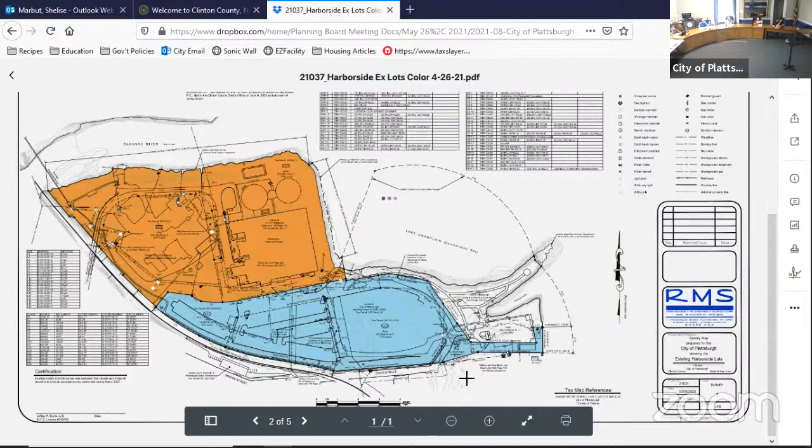That's the proposed plans. So this is proposed, and there's an existing colorized one as well. So real quickly to Rick's point on that, the colorized maps were not updated after we added the Green Street extension to the final plat. These were just for you guys, so they're a little bit easier to understand. Those colorized maps do not match the final plat. Got it, that's why I'm giving you the black and white one. I'm sorry, I should have said that before. We didn't ask RMS to do that because it would have been another step, more money, blah, blah, blah.

And this is just for reference purposes only, but the final plat does include the extension of Green Street, which is the black and white one that is also in your packet. Will it include a 66-foot wide street right of way?

I don't know about 66 feet. I think we're gonna get as much as we possibly can. We probably can get 66 feet there. Well, I say that because the minimum is 60, that's the requirement when we impose it on the public.

Right, and this road is very interesting. I don't know the road width off the top of my head, but it's very, very narrow and barely fits two-way traffic as it is. So you're right, we should have a really good right of way so that improvements in the future can be completed. Absolutely. Really it's a nightmare, and that light is so confusing. The other light stays red on Bridge Street when you're turning right, and that light is green coming off of Bridge Street. It's tough.

We've recommended a traffic study so that improvements can be done in the future, especially with the farmer's market down there and any other future development. As you guys know, we're doing the Harborside master plan, so this intersection absolutely needs to get improved.

So that's a good segue to a question I had about the subdivision. I know that the master plan process is going. Yeah, it's tough, the overlap. Well, yeah, and there's a community advisory group, which I think is assisting the master plan. So, but this is happening on a parallel track, and I'm curious about the intersections between those processes.

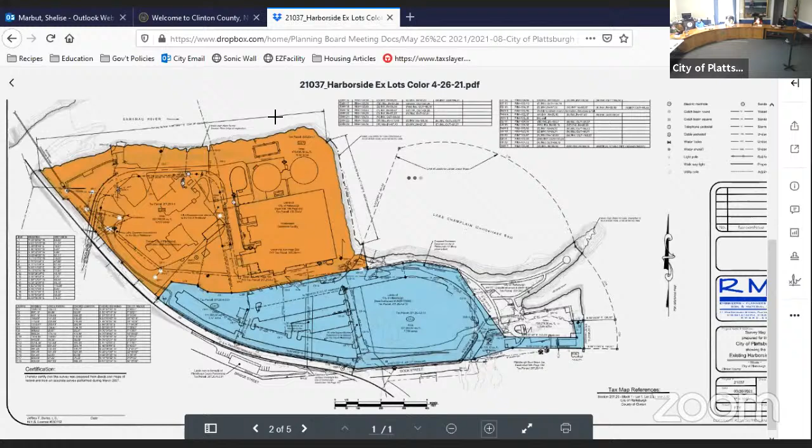Can you give us any update on where the conversations with the hotel are? I honestly have not been part of those conversations. I think we've been in talks with Skyward. There's no developer agreement signed yet. We haven't even seen a sketch plan at this point. I think they're still working behind the scenes trying to figure out financing, et cetera. That's all I know.

And are the consultants on the Harborside Master Plan involved in that? They are aware of it. They have a copy of the RFP that we put out, and they know we had some interest from Skyward, so yes, they know that is impending. But as far as being part of the conversation, not yet. When we did meet with Skyward, we let them know that we have a master plan pending for this site and that there needs to be close coordination, especially around the conversation about public-private partnerships and allowing access to their site, the public boat launch, the marina, et cetera. So they're very aware of that. And you guys know that site plan will come in front of you, and you'll have to do a very thorough review and have a conversation about it as well.

So a couple of technical questions. On Green Street and Dock Street, are we going to maintain the turnarounds for city vehicle access? Yeah. This map doesn't show it, but absolutely, when there's a site plan in front of you, we'll have an access easement that goes from Green Street through the works facility, through the parking lots, all the way out to Dock Street. So they're going to do it through an access easement, not a physical bounded right-of-way turnaround? Access easement. Same thing, shared access easements across the parcel, I'm assuming, is going to be maintained.

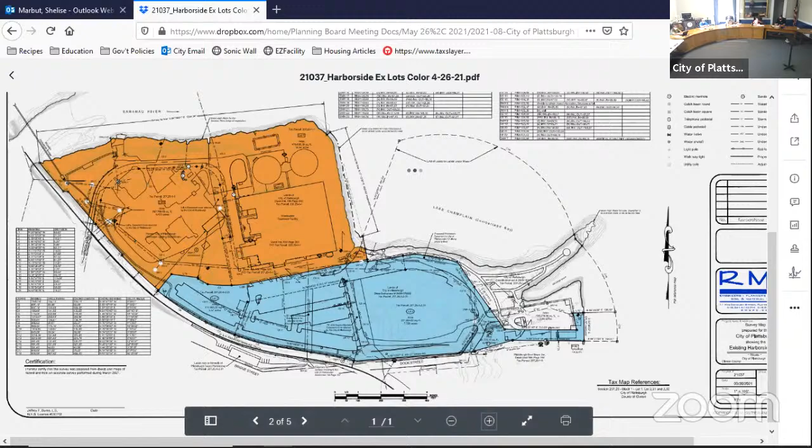All right, so Oval Craft Brewing, this is a historic site review. It's a proposal for an addition, a 20 by 30 paver patio on the south end of Oval Craft Brewing with a pergola. They required a number of variances and a special use permit, for expansion of an eating and drinking facility in the RC2 district. That special use permit was achieved at last week's zoning board meeting. It also required variances for front yard setbacks and side yard setbacks, which were also achieved at the zoning board meeting.

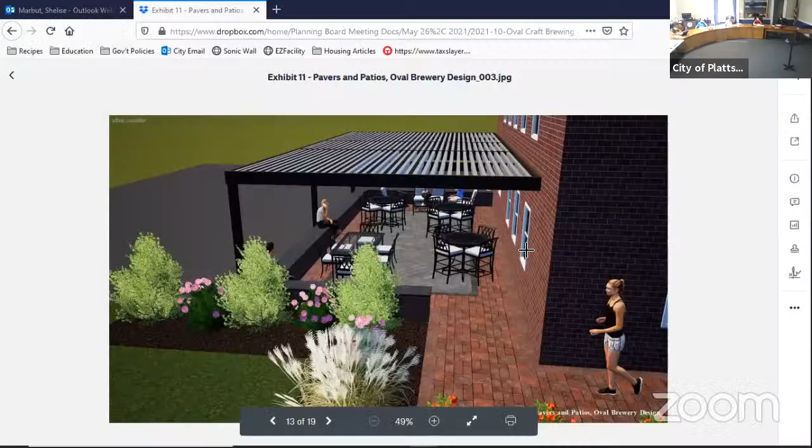The only comments I really had for this one were in regards to the adjacent property access drive, which is IDEW. I requested some additional information regarding people pulling into that driveway, and whether they'll be parking next to the patio now since it's closer to the seating area, and just a general parking layout for this addition. I know a lot of people park across the street and in the rear of the building, but I had some questions about parking on site now with this patio addition.

Another comment about the roof pitch - the elevation drawings submitted were a little different than the rendering, so just some clarification on the actual roof pitch, and how the pergola is going to be attached to the existing building. Additional information is needed regarding landscaping, lighting, and any signage. SHPO did review this one because it's on the base, and they provided a letter saying there were no negative impacts. So SHPO review is completed.

You guys have any questions on this one?

It looks really cool in the rendering, so I have to say, I love that these are provided to us. It's a big improvement over lawn chairs. A lot of people stay outside now, and it's great for today's market, with COVID.

Question on this one? Yeah. All right.

And can I please have a roll call? Jim Arbella, here. Derek Rosenbaum, here. Rick Perry, present. Rich Carter, here. Kurt Burbidge, yes. Lori Reed, present. Thank you.

And to start, I believe we do have a change in our makeup of our planning board. We did have a recent resignation, Marissa Gilbert. We do have a resolution of appreciation. Shelise, we can read that into the minutes.

Resolution 2021-A, expressing appreciation and gratitude to Marissa Gilbert for exemplary service as a member of the planning board of the City of Plattsburgh. Whereas Marissa Gilbert has served with distinction as a member of the planning board of the City of Plattsburgh since 2015 and has retired from service as of May 2021. And whereas during her tenure as vice chairman of the planning board, Ms. Gilbert displayed able leadership and guidance in this role. And whereas Ms. Gilbert has given generously of her time and efforts in a dignified, faithful, and professional manner, and through her service has made outstanding contributions to the welfare, safety, and quality of life in the City of Plattsburgh and to the preservation of its natural and historic resources. And whereas Ms. Gilbert has earned the respect of colleagues in the City of Plattsburgh, now therefore be it resolved that the planning board of the City of Plattsburgh thanks Marissa Gilbert for her years of service and expresses its appreciation and gratitude for her exemplary service and many contributions to the City of Plattsburgh and its residents. And further be it resolved that the planning board decrees that Marissa Gilbert be furnished a copy of this resolution, which is included within the minutes of the May 26, 2021 City of Plattsburgh Planning Board meeting.

Thank you. And to add to that a little bit, I believe Marissa is one of our longest serving board members of any board in the city at the moment. She was on the zoning board since the mid-90s before coming to the planning board. So definitely to show great appreciation, definite appreciation for her.

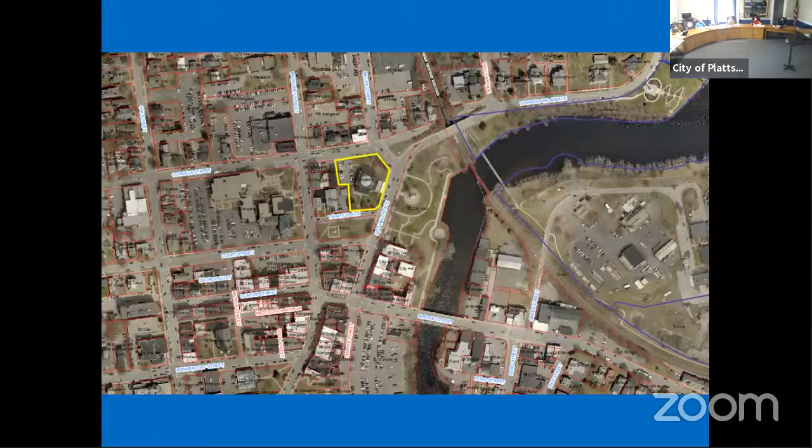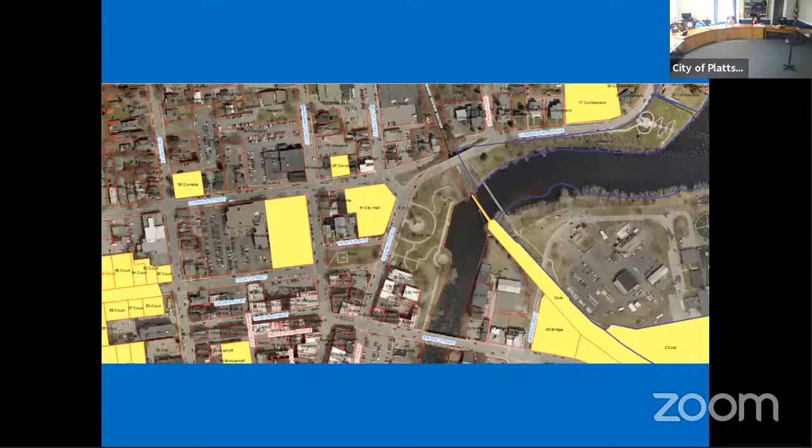So as I said, because City Hall is a registered historic site, we did have to coordinate with SHPO for any physical alterations to the exterior of the building. We submitted this project to SHPO. They did provide an initial review letter. They are requesting some additional information from us, including a side-by-side dimension comparison drawing of the existing and the proposed windows. They've requested that the ogee lugs, which is like that little decorative piece on the windowsill, remain in the replica windows.

In addition, they're recommending that the window that was restored as the test window remain in place as well. So I received a side-by-side dimension drawing from MQ Windows, who will be the vendor for this project, earlier today. I did submit that to CRIS for formal review, and they also responded to number 2 and 3. So for number 2, the replica windows will include the ogee lugs. And then number 3, the restoration window in the building inspector's office will remain in place. So this has been responded to. We have not obviously received a formal response from SHPO yet, but the city has responded.

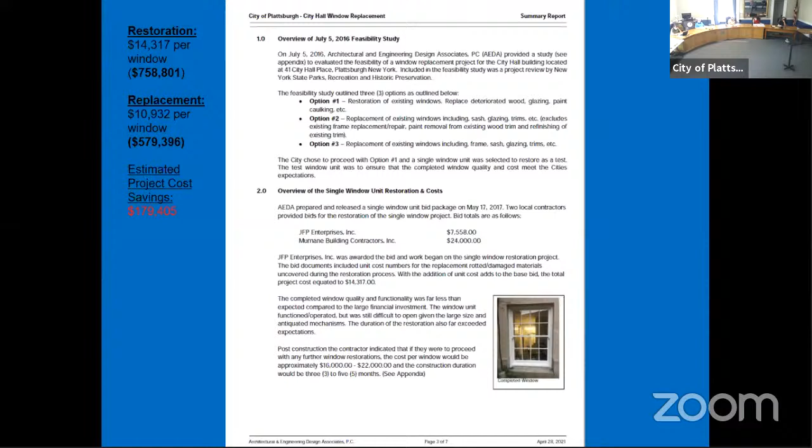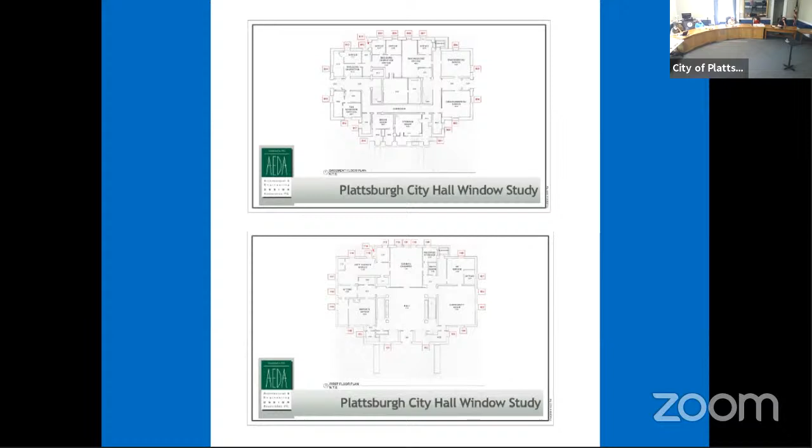So now we're going with option 2, which is replacement of the windows. At least we're proposing that. This is just a floor plan layout that was in the feasibility study. I just thought I'd throw it in here in case anyone wanted to speak to it, just showing where all the existing windows are now. Again, just the floor plan layout.

This is a quote that we received from MQ Windows, who will probably be our sole source provider. They quoted the replacement of the windows, including installation, at $490,000. As I said earlier, the city received a $300,000 DASNY grant in 2016, and we also have $250,000 from IEP to cover the cost.

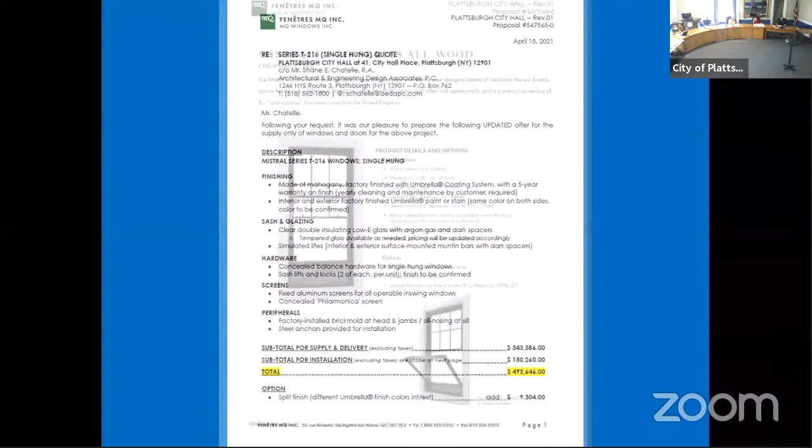This was a spec sheet that MQ provided of the T216 window, which is the window up there underneath the screen. It is a wood window made out of mahogany, and it will be painted to match the existing windows. And this is a spec sheet that they provided showing the number of windows and the different sizes throughout City Hall.

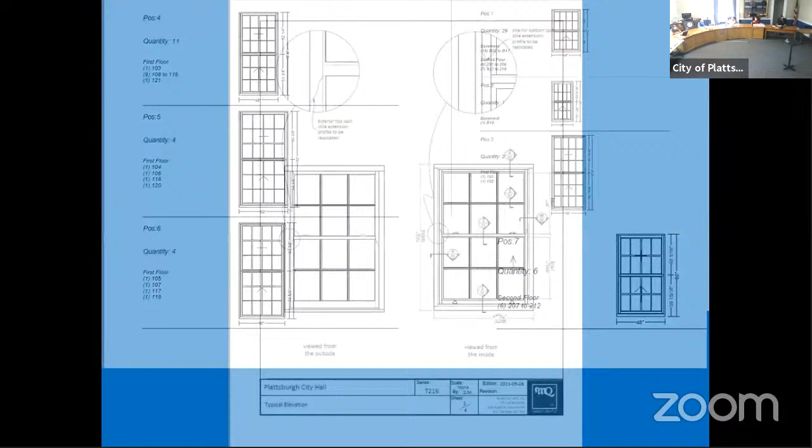And then SEQRA. So for this project, because it is historic, I looked at the type 1 action, looked at it being a type 1 action, but a type 1 action is only triggered if 25% of any threshold established in the type 1 action is hit. So this one is a city, town, or village having a population of 150,000 persons or less, a facility with more than 100,000 square feet of gross floor area would trigger a type 1 action. But because it's historic, only 25% of that threshold has to be met, which means if the building was 25,000 square feet, it would be a type 1 action.

City Hall is 24,961 square feet, so we can get away with not doing a type 1 action. This will be an unlisted action, and I confirmed that with counsel. It's very, very close.

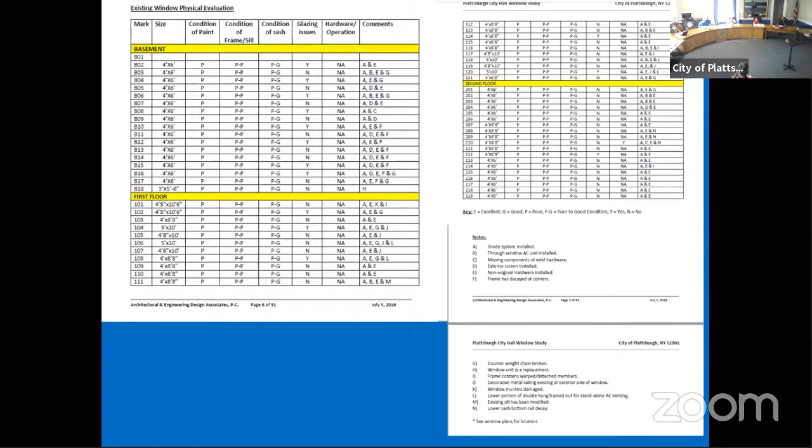I didn't finish today, but I was trying to figure out windows, and it looks like your windows are going to be that big when it's done. In fact, they really do match like for like within the existing frame, it's quite remarkable. So dimensionally speaking, they're going to be very similar to what they are now.

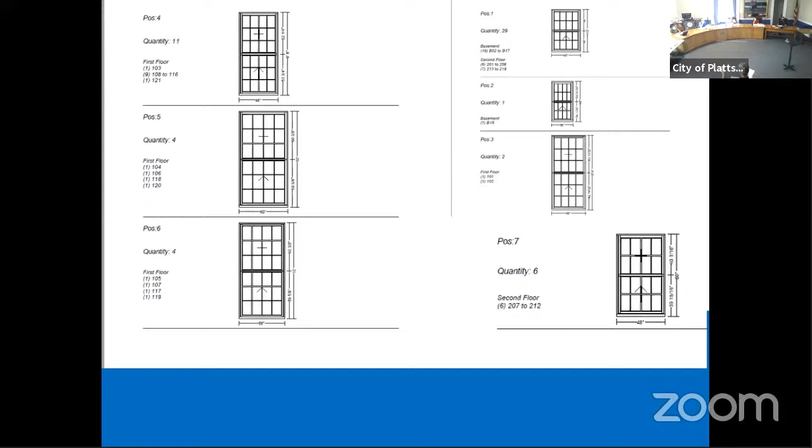The major differences will be that they'll be double pane with argon gas in between, which provides a high level of insulation, especially compared to the single pane glass that exists now. But almost more importantly, they have a low-E coating, which reflects sunlight and keeps air conditioning bills way down. Those are the major fundamental differences between these windows and what's proposed by the replication company. And those are things you cannot get through the restoration process, which we tried previously.

Does everybody agree that it makes sense to retain a restored window, or is that an accommodation for people, the restored window downstairs? Yeah, I'm getting the sense nobody does. I think it's part of the SHPO requirement, and obviously we'll follow those guidelines as well, or retain that window. We paid $14,000 for it, we might as well keep it.

We could put a plaque out there that says original City Hall window, I don't know. And if you haven't really seen it, we'd be happy to show you the replaced window.

I look at the replacement window as absolutely the best alternative. It's going to be in pristine condition for many years. It's going to be energy efficient. It's going to be extremely similar.

It may not be the same wood, but do we know this is the original wood? I have to think not, just because of the overall size and the difficulty in maintaining them. I think the alternative of replacement windows is in the best interest of the community.

So the wood, it's a single glass panel. The wood mullions, I believe they're called, or sorry, muntins is what they call them, they're just applied to the outside of the glass. And then there's a support inside the glass. It's on page D2. Are they fixed, not removable? Right, I believe they're here too. Okay, so that structure will have the same look as what there is now.

Right, and actually that, for as far as the R value or the U value with its thermal properties, is a huge advantage to have that continuous glass rather than a piece of wood that would conduct. Right, yep, thank you.

I apologize if this has already been answered, but I guess I'm coming back to these frames in the matrix. The majority of the frames being in poor condition, and we're not replacing the frames. I mean, I'm very much in favor of doing this, but what's the consequence of not replacing those frames if they're all in poor condition?

I guess I didn't do this first evaluation, so I'm not sure what qualified as the frames. I'm trying to find that. Right, so Mike said the exterior trim that you can see here abutting the stone will be replaced.

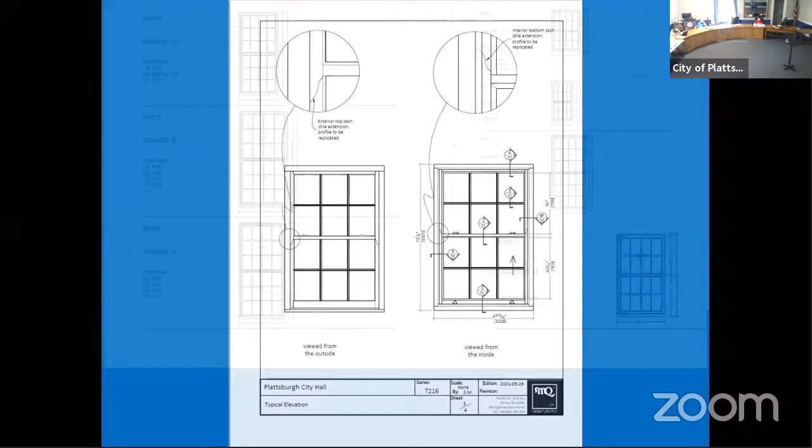But the details that MQ provided include the frame. Yes, because the frame is what houses that hanging counterweight, and that's all to be removed, that's obsolete. Anyway, so right here is the proposal from MQ outlining their scope of work.

Is there a provision in there to insulate the cavity that the counterweight sits in? It's just a void space. And obviously it's not energy efficient as it is. I think it would be beneficial to at least explore insulating that area, otherwise you're still gonna have a void space. No, I agree, I think that would be a wise thing during the construction process after removal of the existing window frame to fill that cavity. It would also offer more support for the frame in there as well.

Depends what they're measuring - if they're measuring from stone to stone on each side, then that should account for everything. These counterweights are typically about a foot high and probably a 2-inch diameter, and they go right in the cavity on the inside here. You ever see the rope that is hinged in the frame? That's what it's working, it's holding the counterweight.

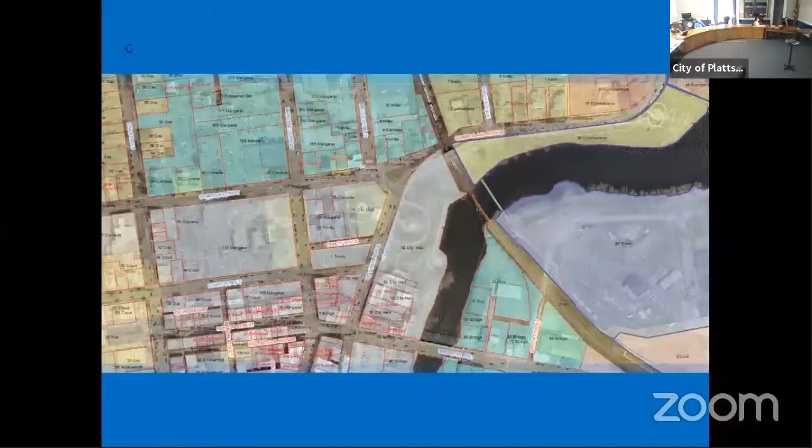Moving to the planning board item, you back? You got this? Planning board item 2021-10, Oval Craft Brewing Historic Site Review. Lisa, summary.

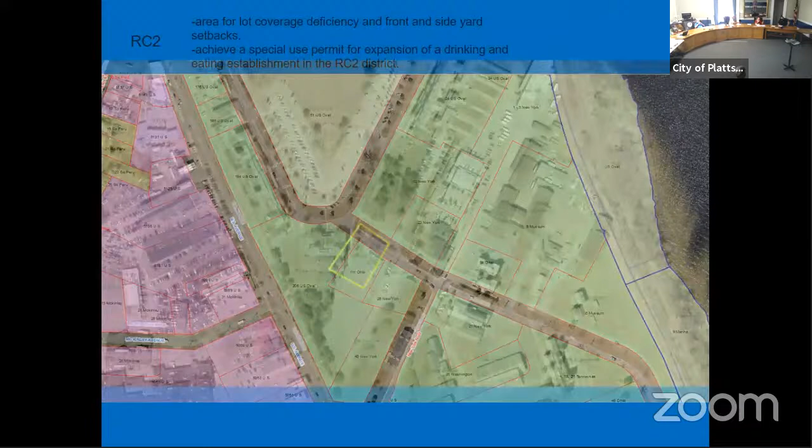Item number 2 tonight, planning board item number 2021-10, Oval Craft Brewing Historic Site Review. This is a request to construct a 20 by 30 paver patio with a pergola roof with an 18-inch brick wall in the expanded Oval Historic District located at 111 Ohio Avenue. SHPO coordination required, zone RC2, tax map parcel ID number 221.16-1-17.5.

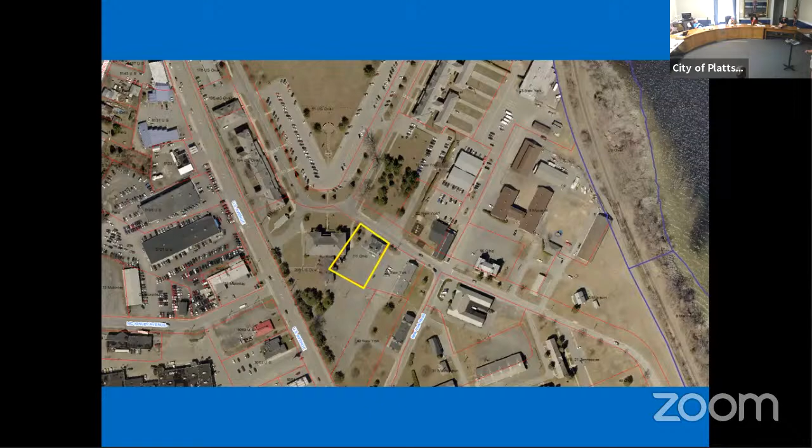The applicant is Jesse Joliker, and the plan preparer is Jesse. Okay, so here's an overview of the site. This is at 111 Ohio Avenue, on the corner of Ohio and US Oval. Here's our zoning map showing the property in the RC2 district.

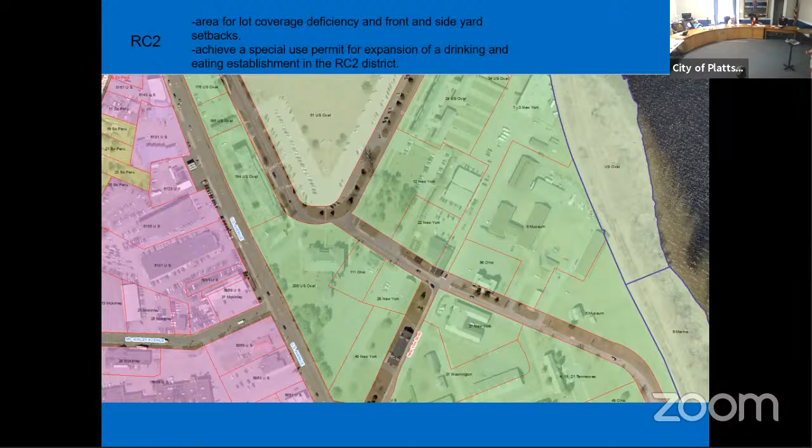For this project, Jesse was required to get a number of variances and a special use permit from the zoning board: a special use permit for expansion of a drinking/eating establishment in the RC2 district, and area variances for lot coverage deficiency and front and side yard setbacks. Those variances were achieved at the zoning board meeting last week, and so was the special use permit.

As I said, SHPO coordination was required. They did provide a review letter dated May 24th, and they said based on the review, it's the opinion of SHPO that the proposed project will not have an adverse effect on historic and cultural resources.

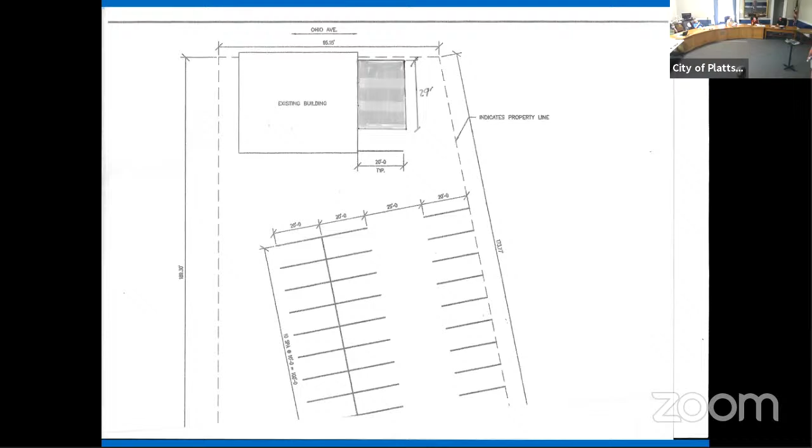Here's a site image of the building standing on Ohio Avenue. This is the south side of the building where the addition is proposed, in the parking lot area. And here's a simple site plan. You can see the existing building here, Ohio Avenue, this is the 20 by 27 patio addition, and parking in the rear.

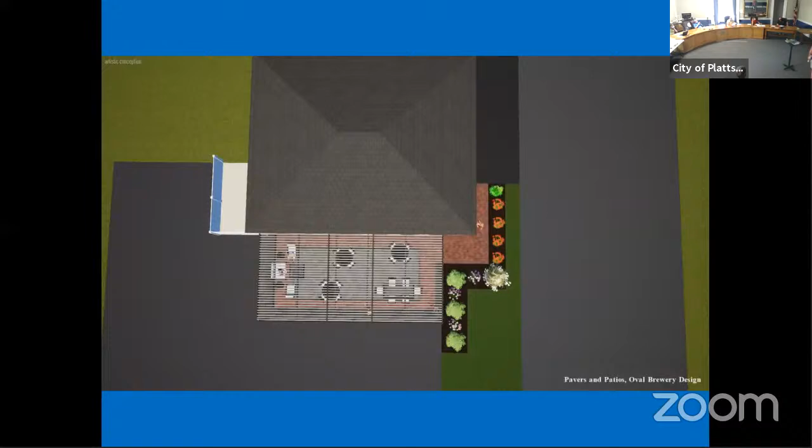Here's the general elevation of the building showing the patio, the 18-inch wall, and the pergola roof, which is open air. Jesse also provided these really cool renderings, which give a really good picture of the proposed project. It's just a top-down view. You can see the open air pergola, some additional paver bricks leading to the front door of the building, and some landscaping.

I also have to point out that I love that the wall was built so that people can linger on it and sit on it. It's a great place as well, and it provides additional seating.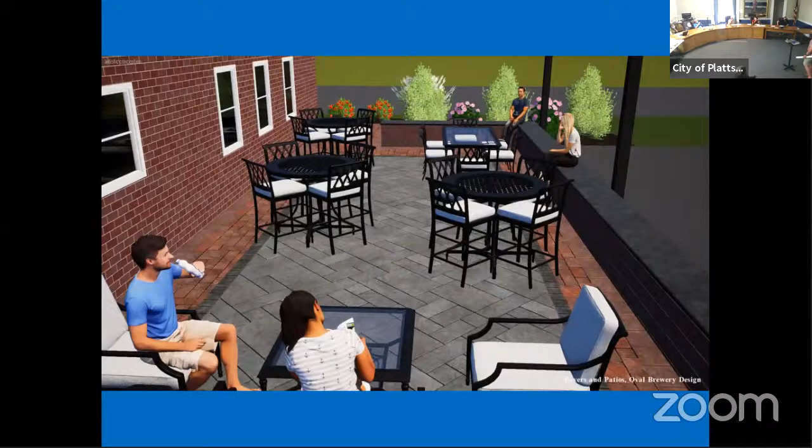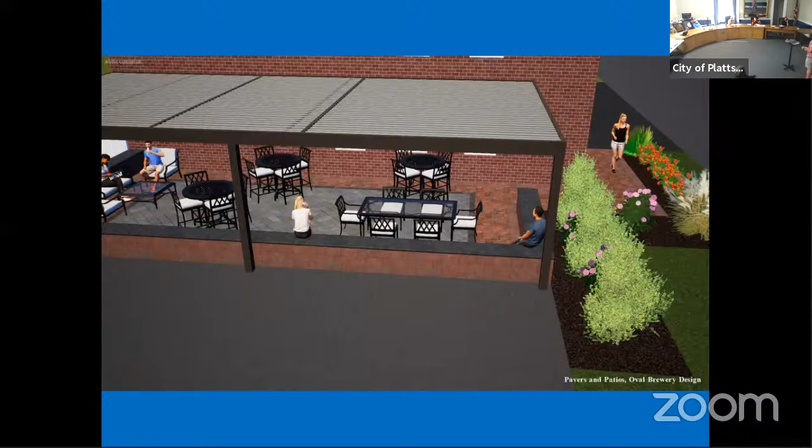So a few of my comments, I'll just go through those while I have the images up here. I just requested some additional information regarding the adjacent access drive, which is the IBEW building. Curious if access will still be allowed there, if people will park next to this patio, or if parking will still remain across the street in the rear of the building. Again, I just mentioned the roof pitch, confirming what that will look like, and any additional details regarding how the pergola would be attached to the brick siding. And then confirming any landscaping, if this is actually what it's going to look like, if this plan has been finally approved. Any lighting proposed for the exterior, any signage, and also hours of operation for the site. Those are my comments. Now I'll hand over to Jesse.

Oh, before I do this, I'm sorry, I just need to state for the record that we did review the SEQR part 1 and determined it to be an unlisted action.

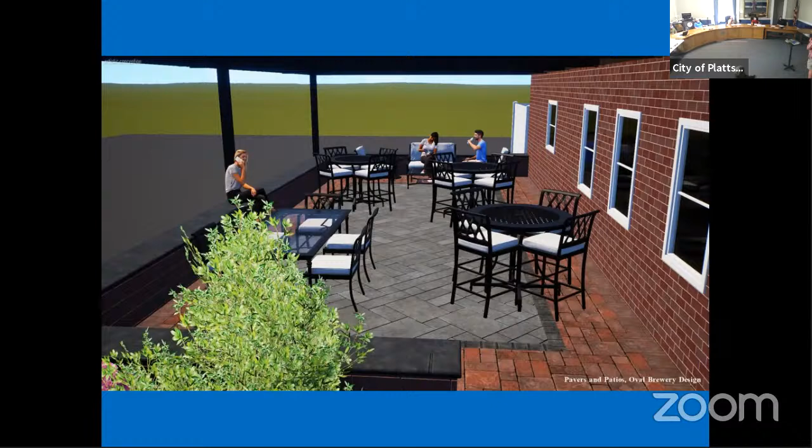So the best way to look at the rendering, as opposed to the technical drawing of the pergola, is the rendering is what the pavers and patio guys provided. This is what the actual pavers will be, with the brick wall where I'll be doing the pergola roof. So for any question about the pavers themselves, that'll be the appearance of the pavers and the wall, where the roof will have some pitch to it.

Because the windows on the brick wall are at about 10.5 feet at the top, it'll be above there, and it'll run out over the 20-foot span, so it'll be about 10 feet high at the end. Maybe a little less, depending on, I want it to look nice like this thing.

So the wall all the way around the paver area, and the beams holding the pergola will be outside of the wall. There will actually be a row of columns running at 10 feet off the building, and another set that run along the building.

I was told by somebody that it can't be attached to the building, because that would put fire suppression underneath. So when I designed the technical drawing, I drew it as not being attached to the building. Instead, we had that set of 3 columns support the header. And the actual pergola will rest on top of the header, set right across the width of the structure.

I'll use what they call a hurricane mount, basically a metal mount where one part attaches to the header and the other attaches to the pergola. And then we'll also have bracing between the pergola to keep it from moving, twisting, or anything.

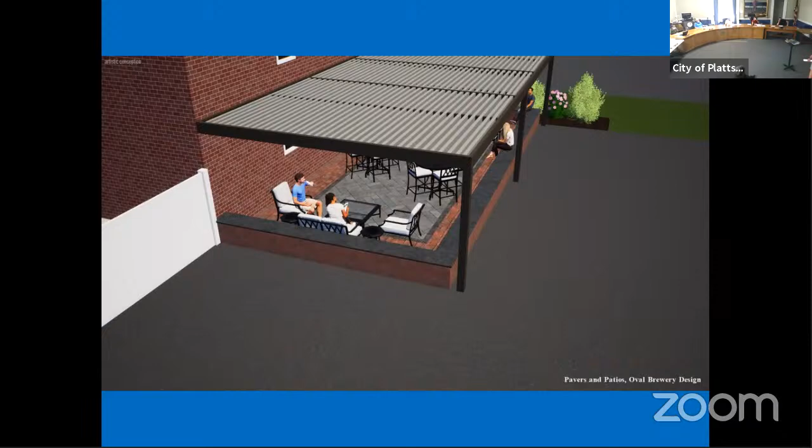There's another question on lighting. As it is right now, there's already a floodlight on that side of the building shining down, so I don't know if I would need any more lighting. If there were going to be any more lighting, it would be atmosphere lighting, not light in the parking lot. It would just be atmosphere, like a light string, like an Edison bulb kind of thing, kind of what I use indoors as well, so I had that same experience.

Jesse, how close will the header be to the brick wall? I want it to be maybe an inch off. That's my goal, as close as possible to not be noticeable, but not attached. Whoever gave you the advice of not anchoring it was wise, that was good advice. Because if you attached it, it would make it part of the principal structure. As it is, being independent makes it accessory to the principal structure, which falls under a completely separate category. So I think that was good advice.

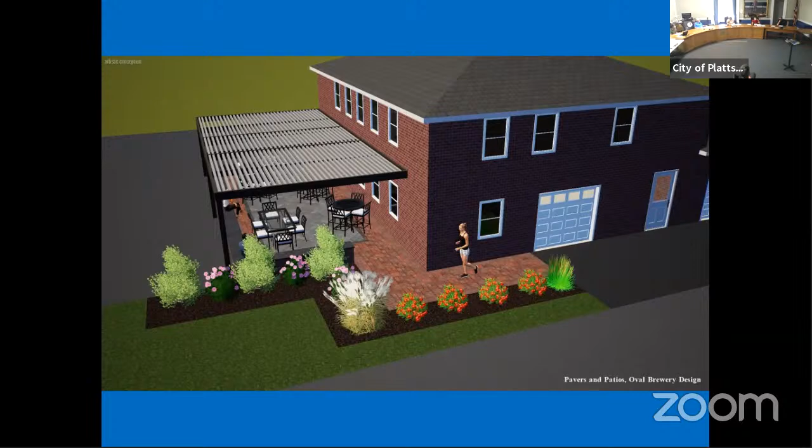Will the retaining wall or seating wall retain water on the interior of the area? Or are you going to put some kind of weeping channel through the wall so any water accumulation inside can be relieved? Yeah, I don't know if it's watertight. I know it's very level right there, so I don't know if water would necessarily pool on the wall, even if there was drainage. I can't answer that, I don't know.

I think your contractor would definitely want to think about that, so you don't have that condition, you have a puddle in the middle of that you can't get rid of. Right, it needs to go through it. Yeah, and actually one thing I did confirm with them is that if somebody spills something out there, I can just hit it with a quick pressure washer to get rid of it, so I'm assuming he would be considering water runoff, moving the water out of there. That's how I would keep it.

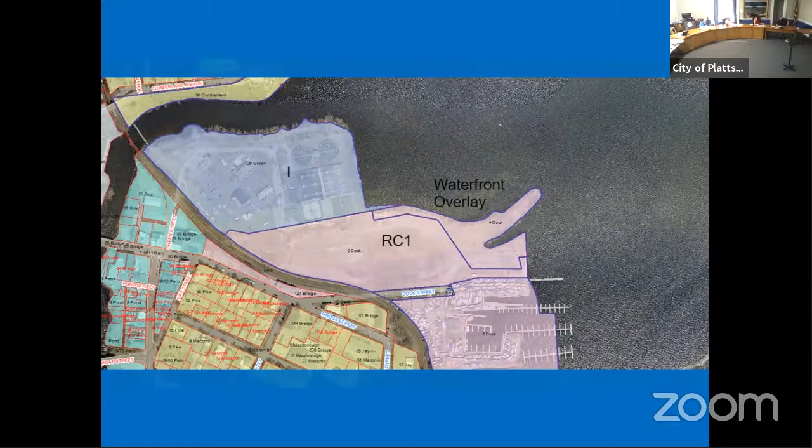This is the zoning map showing the property is split into two different districts. The public facilities are in the industrial district, and the rest of the property is zoned RC1, and all of it is within the waterfront overlay district, which means additional restrictions because it's on the waterfront.

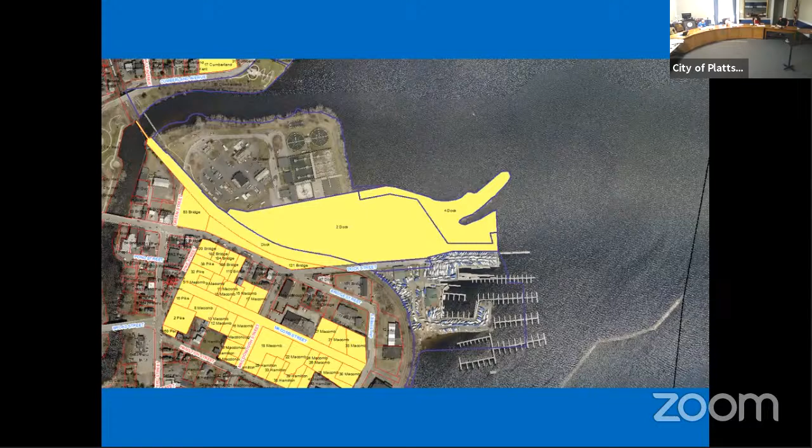Okay, so we're going to do a tour of Harborside. This is driving off of Dock Street, looking directly at the city marina and the marina parking lot, and to the left is Peace Point Park. Hopefully these pictures are in a pretty good order.

This is continuing around Dock Street, which is technically a private road at this point, looking at Peace Point Park.

This is looking directly straight into the property, looking west. This is that vacant undeveloped parcel, about 7 acres.

Just spinning around a little bit. This is sort of like that unofficial parking lot, gravel area along Dock Street.

Continuing back around the property, heading west, this is a little roundabout area near the public boat launch. This is spinning around 360 degrees, looking back towards the water.

Going a little bit farther west in the property, this is the parking area for the public boat launch. A lot of oversized parking spaces here for trucks and trailers. You can see the line of lighting on the left-hand side of this picture. This is approximately where the new lot line will be for the proposed subdivision.

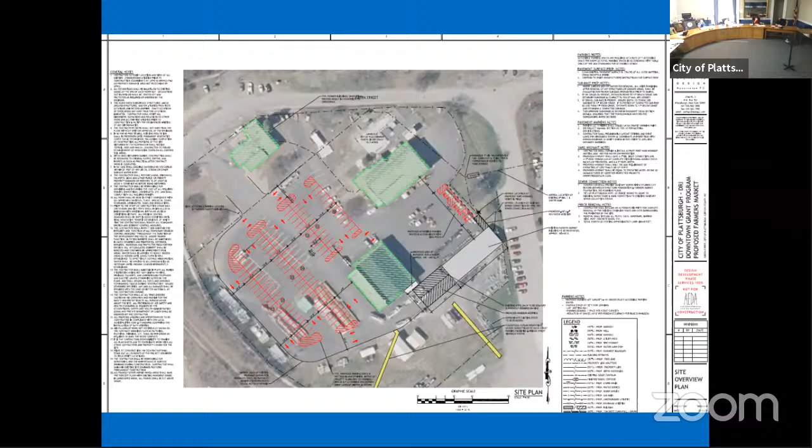So this is the actual final plat. We asked RMS to colorize it because it's a little easier to read than this one. The lot lines are a little different, and the colorized map doesn't include the extension of Green Street, but this is the final map in front of you that was in your packet.

It includes the zoning table, which includes the dimensions for all of the new proposed lots, including Green Street. A lot of utilities down here will require easements once this property is developed, but for the purposes of this subdivision, the city will be retaining all of these lots, so there's no need for those easements. So now I'd like to hand it over to Matt, Aaron, or Jeff, or anyone that'd like to add additional comment.

Before I do that, I'll just say for the record that although this is advisory review only for the board, the council will be conducting a very thorough SEQR review. It will be considered a Type 1 action, and it will be a coordinated review.

Elena, in your parking assessment, you identified at the boat launch 50 parking spaces, and then it says oversized trailer spaces. So I'll go back to that photo. The way the lots are, I can't go back in. Oh, okay, thank you. The way the lots are now, it will actually split that northern parking lot.

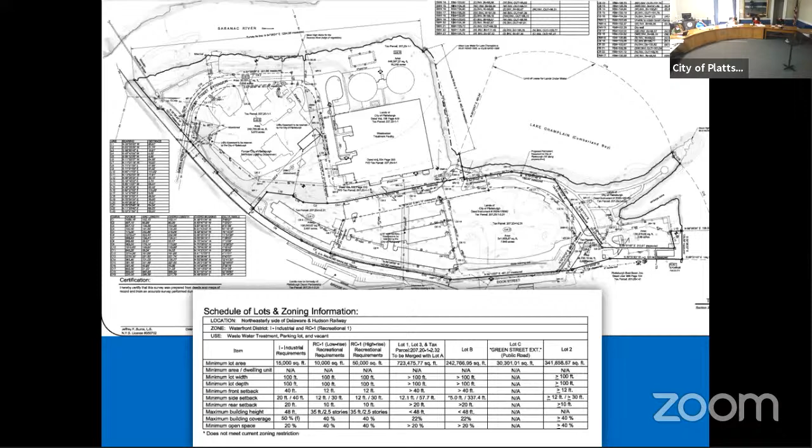But we will have a shared access agreement, shared parking agreement to allow boats and trailers to be able to park on both parcels. They will be allowed to, yeah, because the typical trailer tow vehicle is 44 feet. Exactly, and only some of the spots that are now 50 feet are configured to accommodate trucks and trailers.

But any development on that property will require use of those spots through the site, for boats and trailers, while always maintaining public access. We have to maintain public access to that boat launch, so that's a consideration as well.

Elena, this falls under advisory review because of the new law that was passed, is that correct? Yep, local law P4 from last year.

On this one, the farmer's market lot, that's what I'm going to call it. Will that be considered one of the developable lots? Yes, technically, it's maybe a phase 2 of development. Right now the city will retain that parcel for use of the farmer's market and public use, but 20 years from now, 10 years from now, it technically could be split and subdivided, and that's the intent of extending Green Street, so that potentially a developer could develop a piece of that parcel. But right now there are no plans for it.

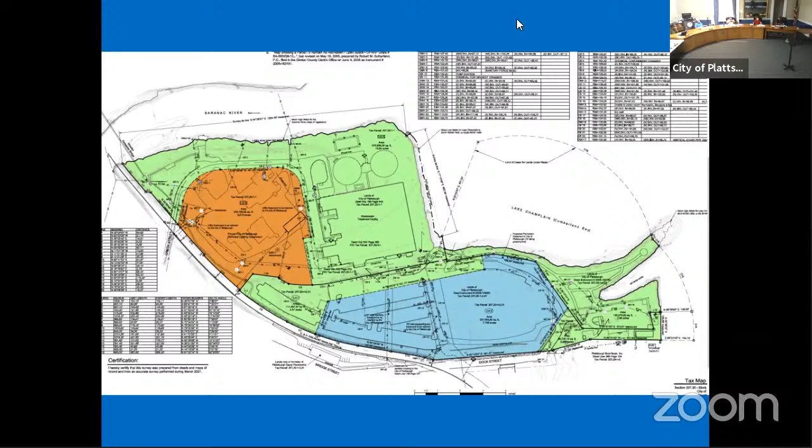Okay, any other comments? If not, what is the summary of it? My understanding, the essence is the whole question around timing, and the fact that we've got a group working in good faith at a time we're trying to build trust. Although technically this precludes nothing, it may be perceived very differently, and to your point, that's when the cracks start. So the question becomes, is there something driving the timing, or do we just wait until the other groups are together and there's a consensus?

So we're talking about rule of reason, not rule of law. I understand rule of law isn't going to change anything, but rule of reason may be very different. Is that the essence of what we're talking about? I'd say that's pretty good, that's a pretty good summary. We'll put together a summary and pass that on.

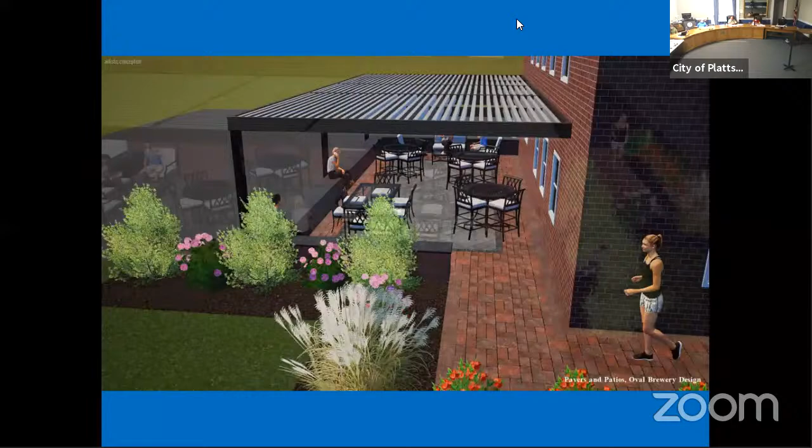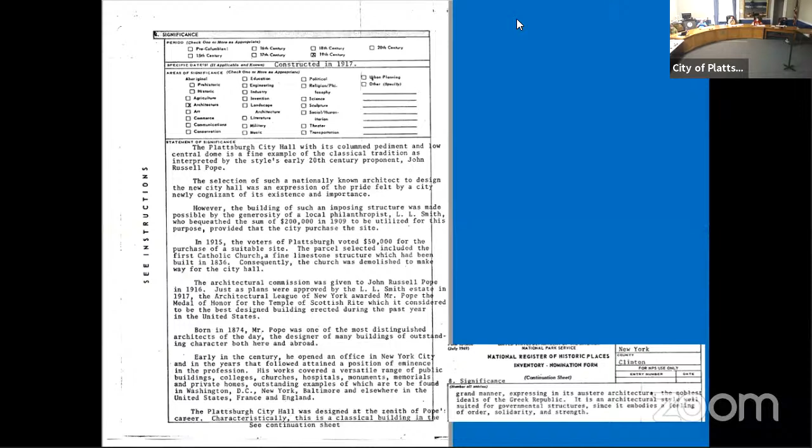The other thing, and I'm not trying to belabor this, but at some point I hope the common council creates an opportunity for the public to weigh in on whether or not the public is interested in any portion of that land down there being developed. Because there's that question: do they want a business down there, as in a hotel? Everyone's been talking about a hotel like it's a foregone conclusion, and it keeps never happening. At some point I hope the council will step back and say maybe we should be rethinking this.

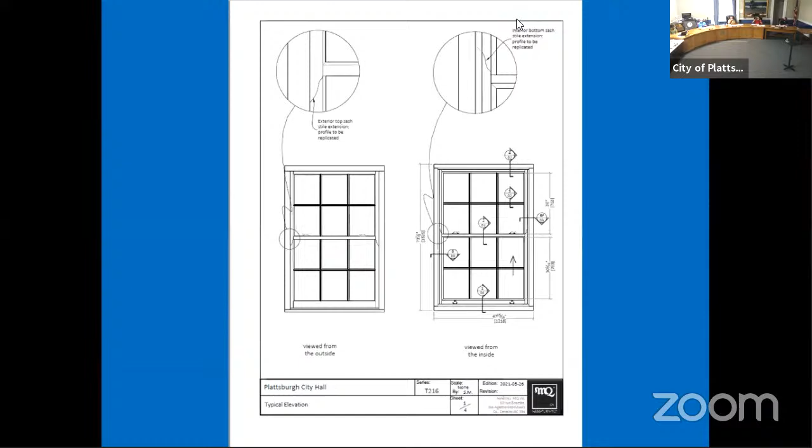Maybe we don't need to keep planning for the hotel that never happens. Maybe we can instead step back and identify this as a beautiful area for the city to develop in a different manner. Just because we talked about it 20 years ago doesn't mean we need to keep kicking the same dead horse. Agreed, and I'm concerned that sometimes a hotel is a default, as opposed to some analysis based on several alternatives and what's best for the city long term. And it may be the hotel, but I don't know that.

No, I've seen some analysis of alternatives. There was a study that was completed, I believe in 2018. Well, we've got a study to cover everything. The question is whether or not they're still relevant, because the ones I hear cited are typically pretty old, we're talking 20 years ago. I'd like a city based on thinking of this decade and beyond. I agree.

Okay, well with that, is there any other comment? I think you have a recording of us, plenty of bullet points written down to summarize that.

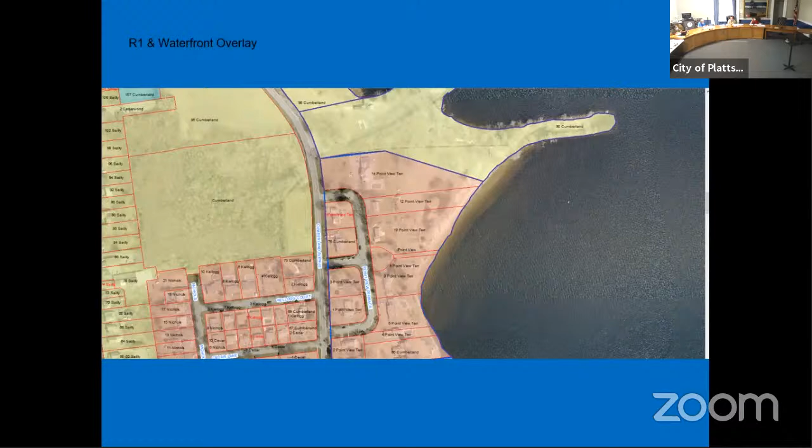Here's an overview of the site off of Point View Terrace, off of Cumberland Avenue. Two parcels are part of the subdivision, 12 and 14 Point View Terrace. Here's the zoning map showing the property is in the R1 district and also the waterfront overlay district. I added this slide because it shows neither property is in the historical district.

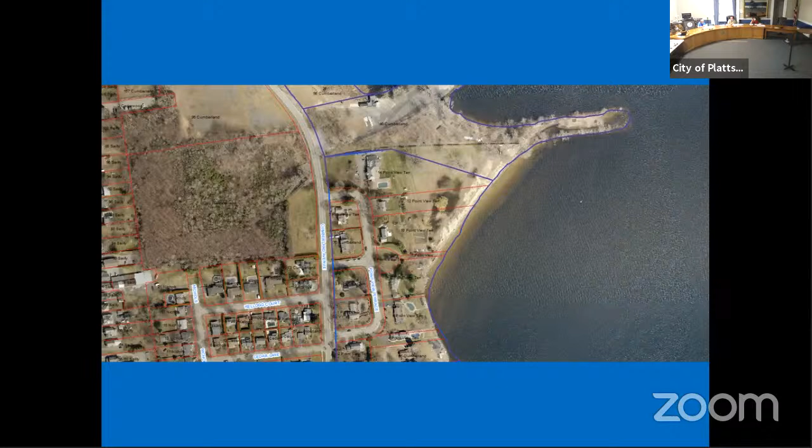Here's a Google image of the site. This is 12 Point View Terrace, the main parcel, and then 14 is down here. This is just the site image, standing on Point View Terrace, looking at 14.

Here's the sketch plan. This was not prepared by a surveyor, but the applicant was informed that for the detailed plan they would have to have a licensed surveyor. This is the property to the north, which is Kjell Dahlen's property. 14 Point View Terrace is this whole portion outlined in yellow. The proposal is to subdivide the property so the new lot line will be this red outline, which basically cuts the property in half. The waterfront portion of the property will be merged with the adjacent property to the north.

I had a lot of comments on this sketch, since we need all the relevant information including tax and parcel IDs, metes and bounds, setback lines, water and sewer mains and laterals, primary and accessory structures, dimensions, etc. - all the basic stuff required for a detailed plan review. I also required that the easterly portion of the property be merged with the northern property, otherwise it would create a landlocked parcel. Obviously we need a zoning table with zoning information for the R1 district and the waterfront overlay district.

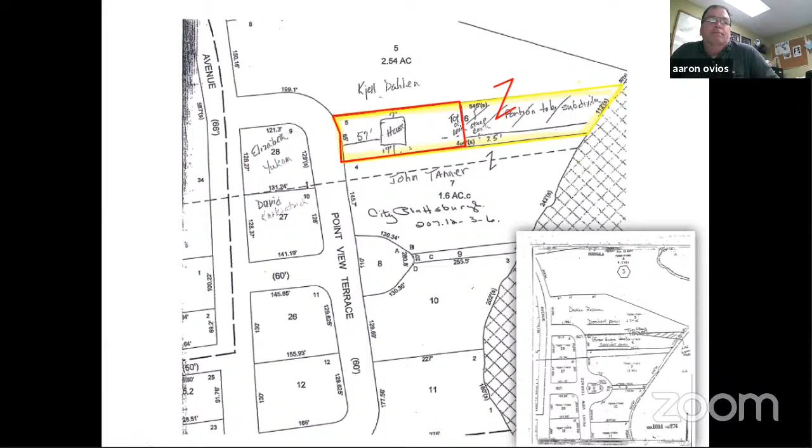So we're not trying to do everything with a minor subdivision all in one. No, this is just a sketch approval. No, we're not there. That's what I thought, that makes sense. So I guess we've got a lot to look at when they come back next month, which will take care of a lot of the questions, but any other questions, I guess.

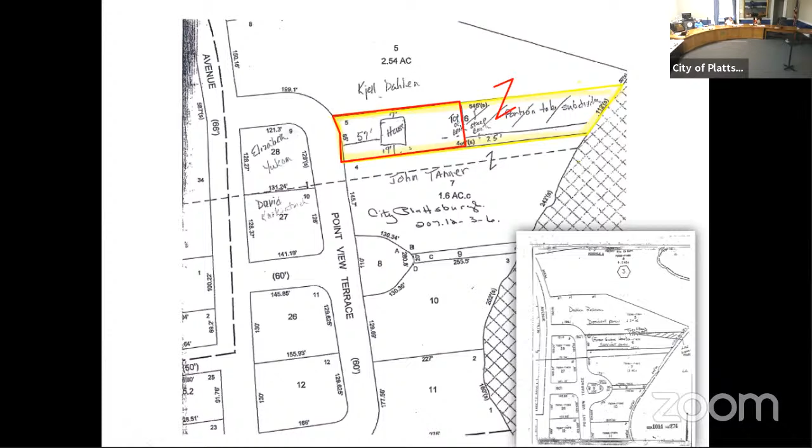Thank you very much. Thank you, Aaron. Next time, let the easy ones go first. Yeah, thank you.

Okay, so moving on to item number 5, which is planning board number 2021-12, the car wash site plan. Elena, take us through it.

We have one person in the attendee list. I don't know if you're looking at this or not. I do know Perry. Yeah, Perry's out of town, but he was going to join by. I don't see him. I do see a different name that I don't recognize. If it's not Perry, then no, not from my side, at least. But Mike is here to present or represent.

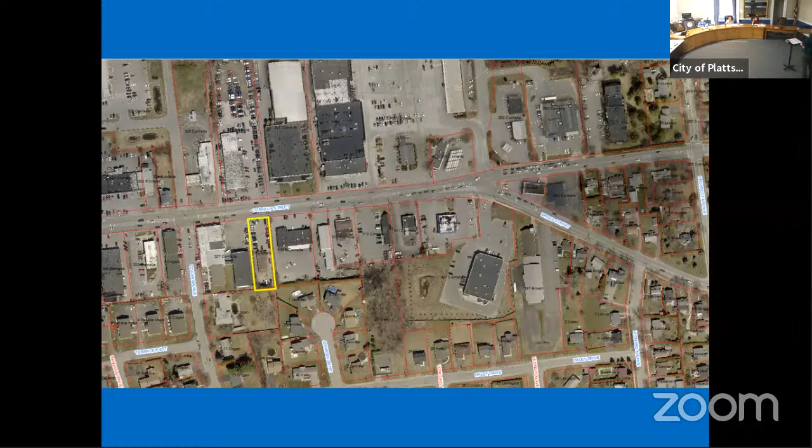Here's the zoning map showing the property is in the B2 district. As I said, multiple variances were required and a special use permit. A special use permit is required for an automobile service within the B2 district. An area variance is required for a drive-through business being closer than 200 feet to a residential district, the R1 district right here. An area variance for side yard setbacks, and an area variance for the commercial drive width. This project was in front of the zoning board last week. Unfortunately, I didn't have quorum, so they weren't able to vote on it, so we'll have to return to the zoning board. But this is a sketch plan approval right now, so there's no need for variances.

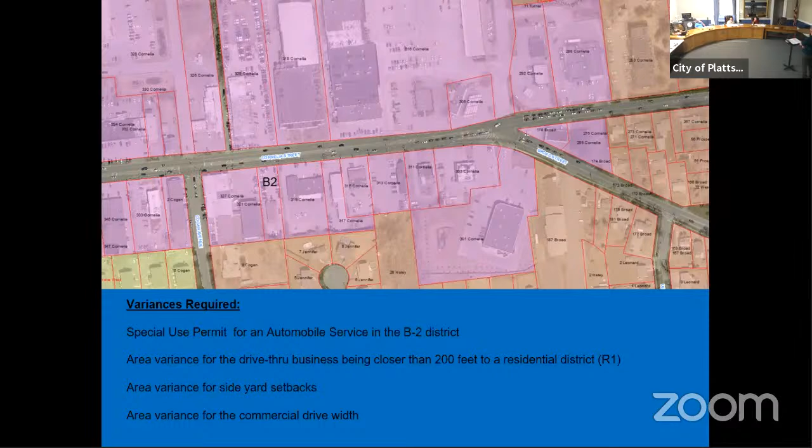And I went out and took some photos this week. This is standing on the site looking back towards Cornelia Street. You can see it's just a large paved vacant parcel, quite narrow. And this is spinning around 360 degrees, looking south. There is a fence here separating the B2 district and this parcel from the residential district.

I took a few photos of the fence because it's in pretty bad shape, and you can actually see right through it, and it really does abut somebody's backyard, the pool and the playground, etc. So one of my comments reviewing this project was there's definitely a need for a really good buffer on the back end of this property, including some hardscape fence, maybe even some landscaping in addition to that, to separate the uses. Again, just another photo of the fence, and you can see it spans the whole property line.

All right, here's the sketch plan. So the proposal is for this 3,600 square foot building. This would be a drive-through car wash.

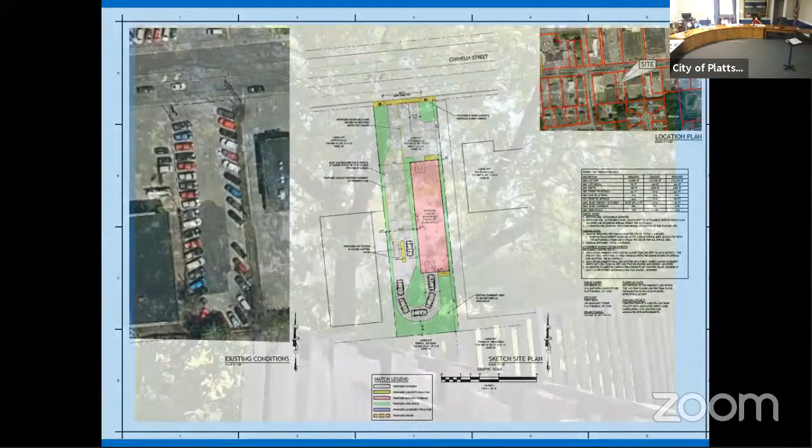It's just like Aaron's and Boyle. Aaron's... well, yeah, Aaron's is 2 lots over, and then there's this building, which I'm not sure what that is. Thank you. Right, this one? We're right here, and it's a little deceiving because this was a building that once upon a time was here—I think it was demolished within the last couple of years. Yes, it's on the south side, right?

Have the neighbors who are going to be adjacent been contacted? Yeah, so they were all notified because the zoning board held a public hearing. Everyone within 500 feet was notified. No residential abutters came or attended via Zoom. A gentleman from the car wash across the street attended—that was the only public comment. Mr. Buck has also reached out to his main abutters. For this property, he's spoken with the abutter directly behind about fixing the fence and everything, and he didn't get any negative response.

In terms of that adjacency to the residential district, it's not just drive-through businesses—it's all the commercial businesses. So the zoning board has had to issue special use permits for all of those commercial properties along the corridor.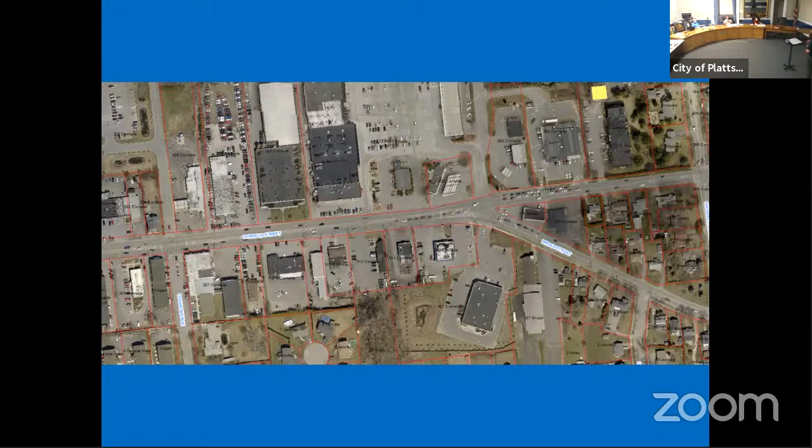Which I'm assuming they're gonna have to pull in, mount the curb, and then pull into one of the parking spaces? Correct, we anticipate they'll do that, and then they'll back up. And actually, if you go back to the site plan, they'll have space for the back and leave, so we don't really see that as a problem, but I'm sure deliveries won't be at peak times, so it shouldn't overlap.

I mean, really, the peak times are mornings when people are going to work, or in the afternoon when leaving work, or on the weekend.

On a site plan, do we typically require something like truck turning patterns? Or are you planning on adding that? Yep, so once we get the survey back and all our boundaries and everything dimensionally is tied down, we'll do the turning patterns for the next review. So you'll see that when we do.

Okay, good. That made me think of something else, as far as a dumpster. Will that be needed? No, we don't anticipate using those.

So essentially this whole half will be the tunnel, and then this part is for the equipment, which is actually far bigger than the equipment actually takes up. So he'll have space in there to store, whether he uses a rolling cart, maybe when he takes out trash or what. Yeah, so there's actually quite a bit of surplus indoor storage space.

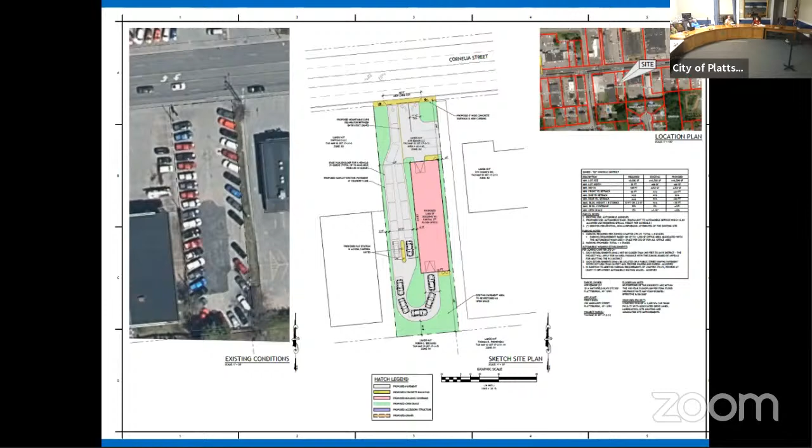Is working on. Yeah, I guess it's up to Jim to close it. Is there anyone on? No.